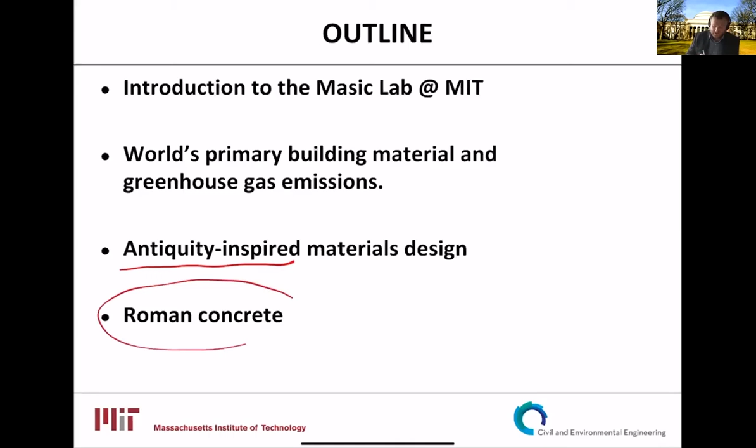At the end, I will focus on Roman concrete as an example of this design. This is the Mašić Lab at MIT, where we design some really high-performance advanced materials of the present and future, including self-healing cements, damage-tolerant ceramics, and even some high-performance photovoltaic devices.

To do this materials design, we try to learn from two essential sources: one is nature, and the other is the ancient world. Especially during my work in Germany, I have been studying biological materials and how these materials perform extraordinarily, and how we can extract some of these concepts. I will introduce this bio-inspired concept quickly in the next slides, and this presentation will focus mainly on the left side of this slide.

Biological materials, I found them fascinating because nature is able to handle very small building blocks, these nano building blocks. Nano means, you know, 1,000th part of a micrometer, so it's 10 to the power minus 9 of a meter, which is a really very small unit that nature manages to organize. Nature learned this through a process called evolution, and we arrived at these high-performance biological materials that are somehow optimized for a specific function.

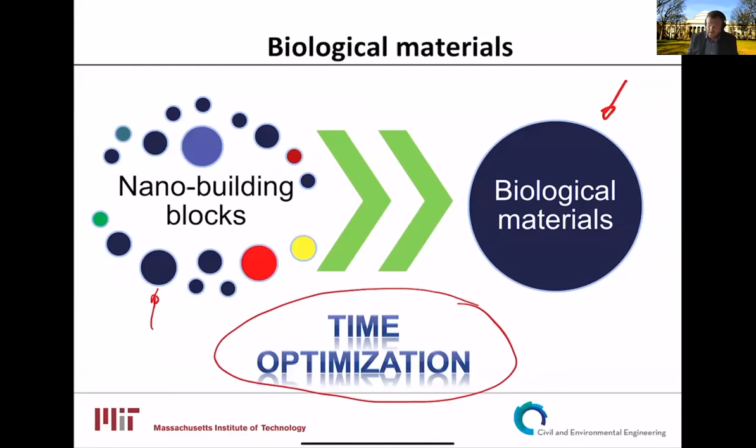What I have been doing in Germany, and then moved also this work to the States, is finding these materials in nature, and then studying them from a macroscopic through micro scale and down to nanoscale.

Eventually you understand these complex structure, function, and chemistry relationships that then allow you to design something that gets close to what nature has been able to make through that process that I mentioned.

So here are three examples. Bone is a self-healing composite made of collagen and mineral apatite, and has a really interesting hierarchical structure that we have been studying and trying to understand, along with the processes that occur during healing, and how these processes might be translated into the inorganic world.

And advanced functional materials. Another example here is using silicates. This is a deep sea sponge that has a very complex structure leading to outstanding mechanical properties of a glass. A glass generally breaks, and these sponges show much better performance.

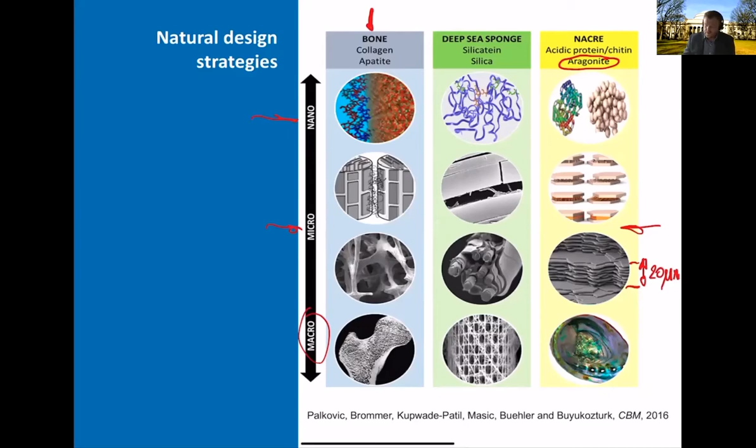So how do we do this? There are many ways to approach this problem, and we in general combine modeling and experiments. My lab is particularly focusing on experimental methods, whereas colleagues are taking care of computational modeling. Our aim in this work is really to cover all of these scales through the methods that we use.

When it comes to experimental methods, I'm covering most of these scales through scanning electron microscopy. You will see some results from this electron microscope.

Diffraction is of course very important and key in all this. My work specifically is Raman spectroscopy, namely interaction of the material with light that then informs us on the structure, which can go down to a molecular scale. So all these spectroscopic and microscopic techniques are correlated with mechanics.

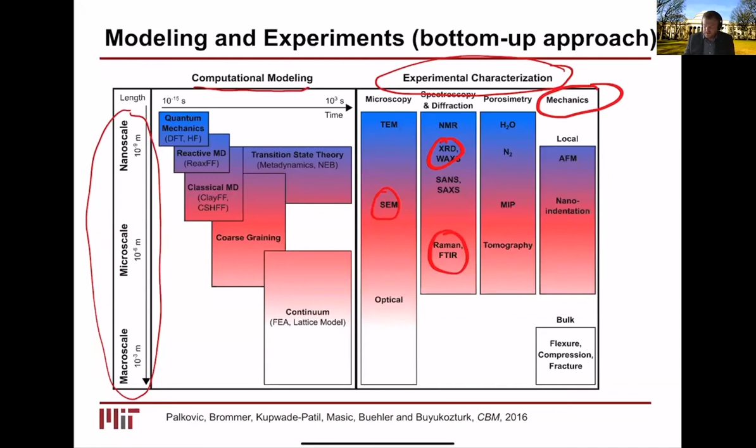And here, from the macroscopic point of view, we are very much interested in macroscopic behavior, compressive strength, but also we explore other scales through micro or nano indentation and atomic force microscopy.

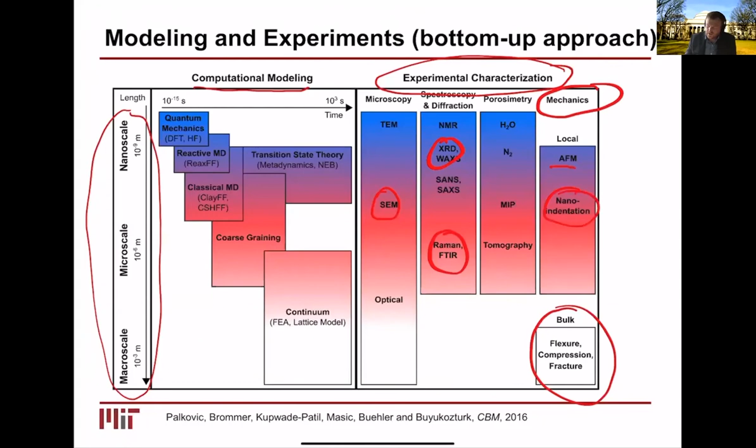Here is an example of the kind of big microscope that covers a lot of these functions, installed in my lab. This is an advanced Raman microscope, so you get molecular level interactions through Raman imaging, but it also has integrated atomic force microscopy for mechanics that you can then correlate with Raman.

It allows you, for example, to work on irregular surfaces, which is often very important with ancient samples that you don't want to touch or prepare before operations. And eventually you like to connect mechanics with all that other signal data.

So you see a very complex characterization platform, but that is the key eventually to move into exploration of complex materials that are biological and ancient materials.

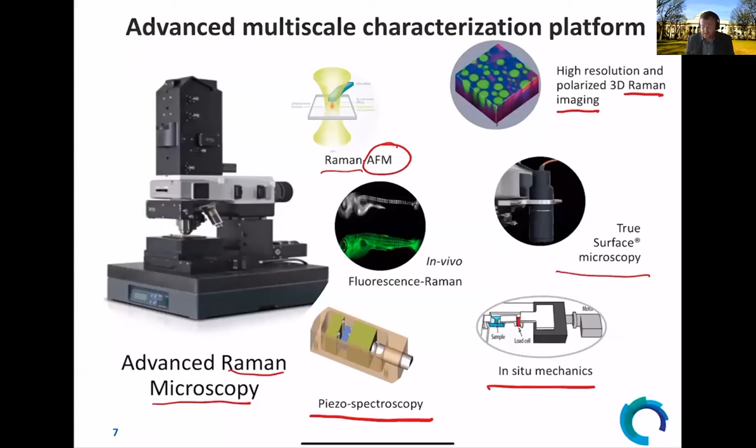When it comes to biological materials, you see from this slide I studied a lot of exotic animals that generally were provided by my colleagues around the world, from Santa Barbara to Singapore and so on. We were able to identify very interesting and intriguing materials that then led to a lot of technological solutions.

Here I show a few examples of those, like this stomatopod, a very beautiful example. It's actually a very beautifully colored shrimp, called mantis shrimp. Interestingly, the mantis shrimp is also quite a nasty animal, in the sense that it uses these clubs here to break protection shells.

Of the animals around it, and then basically eats them. It uses this club to break anything. These clubs indeed require a very high performance impact surface, and this impact surface is outstanding. We studied it, and the results are reported in these publications here.

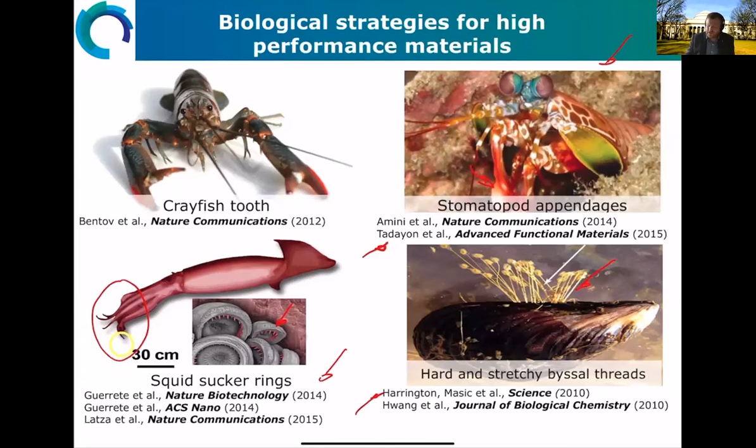And now I see the dates, and I must say it's already a long time ago, a decade ago. Anyways, we look into biology as a great source of inspiration, and we are always in search of materials that could inspire our bio-inspired design. But today I will focus on something different.

And I have a question for you. What is the world's primary building material today? Does anyone know? Anyone? No one responded, but we have a question asking you to clarify something.

What do you mean by thermoplastic protein? Can you elaborate a bit? Yeah, so thermoplastic protein is... let me use this quickly.

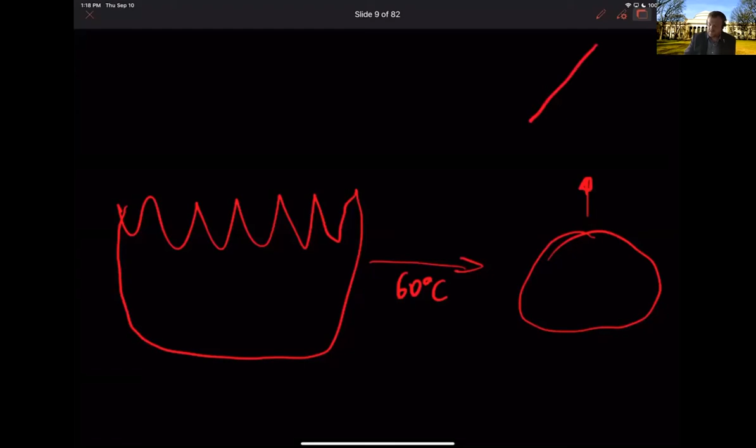So these are like this sucker ring teeth, okay? And if you take this material and put it in water and heat it to about 60 degrees Celsius, this thing will turn into a gel, okay? And then you can deform it and make, I don't know, some sort of shape.

And this thing, upon cooling, will return hard and therefore basically regenerate, let's say, the nanoscale organization that will lead to return of mechanical properties. So it's really as simple as normal plastic, where you basically melt plastic, change the shape, and cool it down. And that's called thermoplasticity.

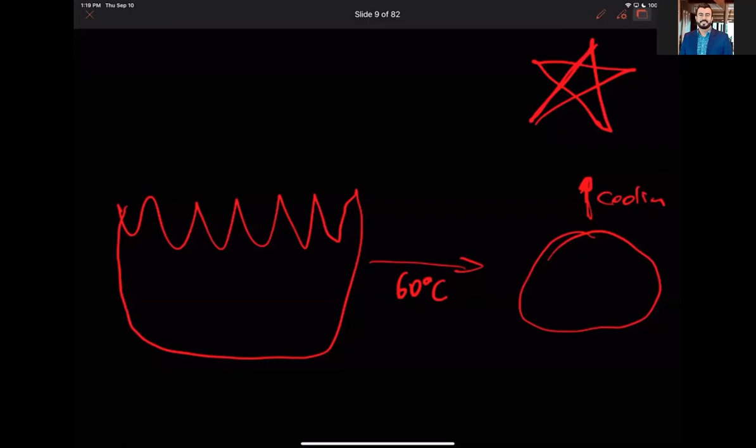And we have an answer from Mr. MD Manjoor Elahi. He said cement. Correct, thank you for helping me with this. So indeed, the world's primary building material is concrete, with its main component cement.

And cement production is really constantly increasing, and expected to hit incredible numbers by 2050. These numbers are between 1.3 and 3.4 tons of cement produced per year per capita. Meaning each of us will account for about 2 tons of cement, because we need that to build our infrastructure, our constructions, or anything where this building material is needed.

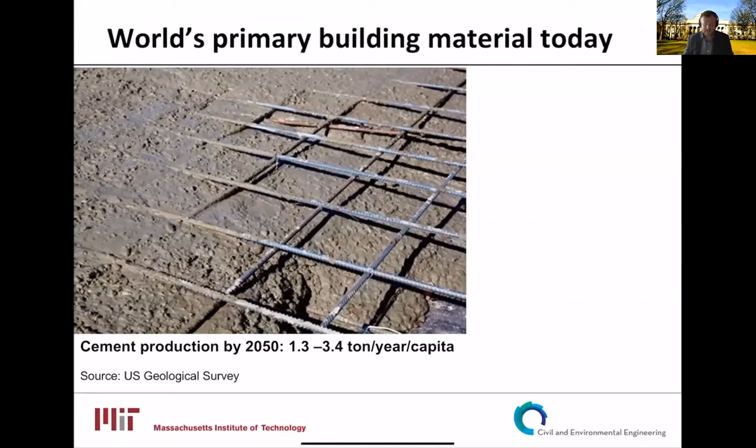So indeed, that's great. We know how to build with cement and concrete, and we have this reinforcement that compensates for problems of concrete in tension. In compression, concrete is really good, but not as well in tension, and this means we need to reinforce it using steel in general.

So the problem, though, for cement is this number here. It turns out that for each ton we produce of cement, we emit about a ton of CO2 equivalents into the atmosphere, which is really a problem, because cement is one of the major contributors to greenhouse gas emissions. We are talking about 8% of total carbon emitted coming only from cement, okay?

Which is huge, and we don't have quite solutions for that. And you know why it's important to stress the fact that CO2 is a problem. I mean, we are quite familiar with the fact that in past years, indeed, we had increase.

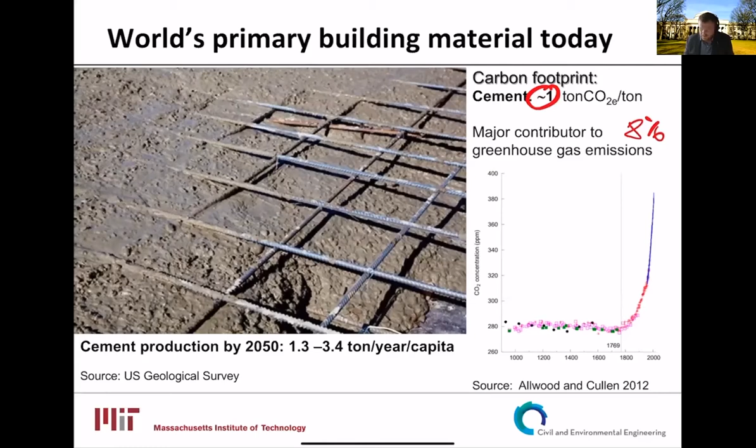I like to show this graph. I don't know if you see here what is plotted, but on the x-axis are years, and here is the concentration of CO2. Okay, and you see these are some of the measurements we know about, and you see it's flat till...

This is another very difficult question, I must say. I don't know even if I should ask, but if anyone knows what this year here represents, please write it in the chat. While I give them time to write down the answer, we had one regarding the previous question.

Anita asked, wasn't clay before the cement? Yeah, that's correct, I must say. We are talking about numbers here mainly - it's what's primary, not first, okay? So primary in terms of quantity, so that is my answer. She says, but thanks, we will be talking about ceramics as well.

So, okay, we have an answer from Amina Patak. She says yes, Industrial Revolution, and Anita does as well. Wonderful, indeed - it's James Watt, invention of the steam engine, and that is somehow indeed the start of the Industrial Revolution. And we do see this incredible increase, and now exponential path of CO2 that we definitely are struggling to control, along with the solutions and the aspects of our lives that lead to this increase.

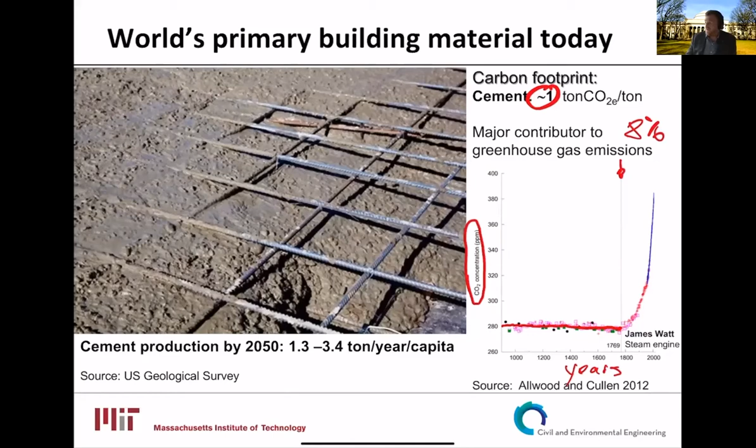So, thank you for wonderful answers. I see a very well-prepared crowd. So now, is it really important, this thing?

We are becoming more and more confident, if not sure, that climate change is real. And projections are quite frightening in a sense that we think between 180 and 320 million individuals will be affected by 2030. So in 10 years from now, such a huge number of people will be affected, and the World Health Organization has pinpointed some of the classes of our society that will be majorly affected.

We are talking about children, who are very vulnerable, elderly people, and unfortunately people that live in countries that are not able to cope with some of these aspects and issues. Outdoor workers definitely are going to struggle with working outside and needing to resist heat that is projected to increase.

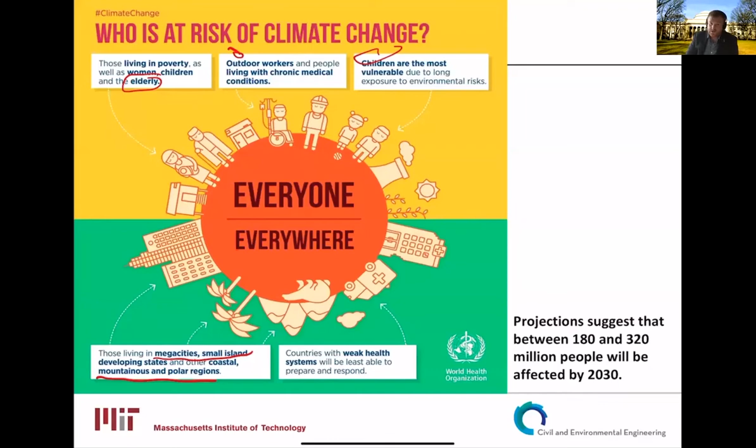I want to stress what I said before - 8% of total reasons for these changes comes from cement. So cement production is definitely a challenging place where we can work on reducing CO2 because of these reasons shown in this slide.

Half of the production of this CO2 emission comes from degradation of the main ingredient necessary to make our cement clinker, and this is calcium carbonate. If you take calcium carbonate and bake it at about 800 degrees C, you will produce calcium oxide plus CO2, and this CO2 is gas - this accounts for 50% of CO2.

And the other part is definitely burning fuel. So most of the fuels we burn indeed produce CO2 and water, and that's a problem.

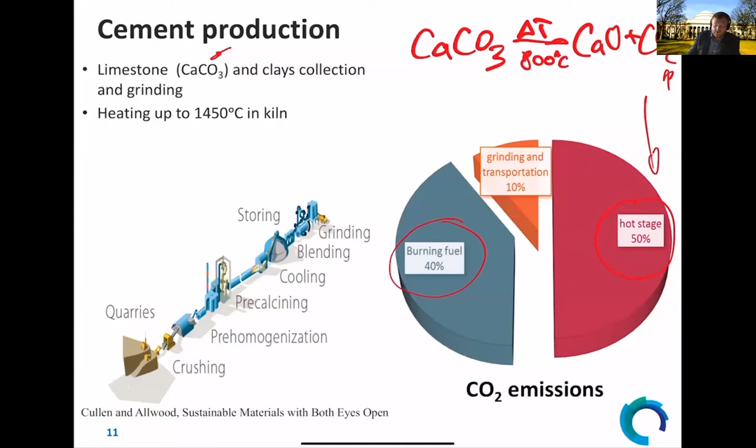The important issue with cement and clinker production is the temperatures - the temperature we need to reach to actually make these reactions to produce clinker, and they arrive at 1450 degrees C. So this temperature is incredibly high and requires a lot of fuel.

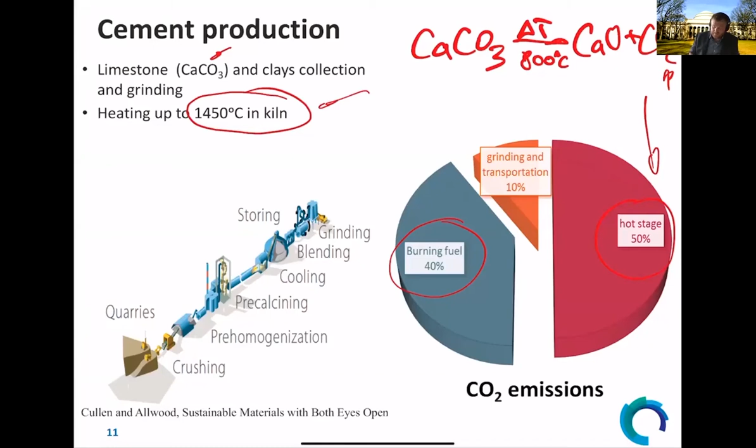So our aim is to work on that temperature and reduce it, but making the same materials for the concrete. Let me tell you a little bit about my opinions on how we can work on reducing the carbon footprint of cement.

One important solution, in my opinion, is really making our constructions in a way so that we use as little as possible cement and concrete. So use less concrete by design, and of course this has to apply from microscopic to macroscopic projects, and try to really optimize design so that we don't need to pour huge amounts of concrete, but still maintain structures in a condition so that they resist and satisfy minimum requirements of performance.

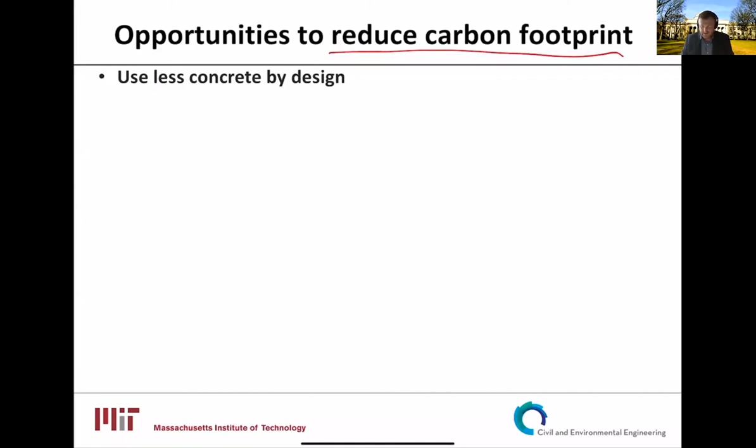Another very interesting perspective is 3D printing of concrete, which brings a great opportunity to place exactly where you want your mortar concrete, and then avoid the parts that perhaps are not load bearing and therefore use less material. That's a really great promise.

There are several challenges associated with this technology. It goes from the macroscopic construction side, to mixing supply, printing systems. Reinforcement is definitely a problem - it's very difficult to integrate and make rebar using 3D printing technology.

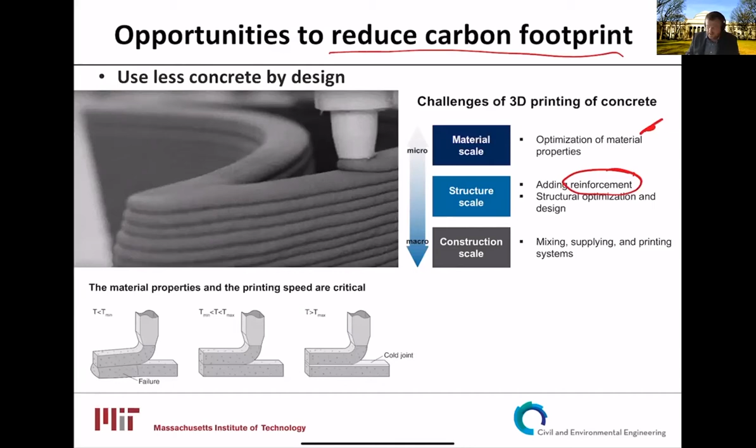And of course, there is a huge effort in making these materials better, especially because we are completely changing the way we build, and so depositing tiny layers of material leads to many optimization aspects that we need to take into account. That's more or less an important challenge we are also dealing with in our lab.

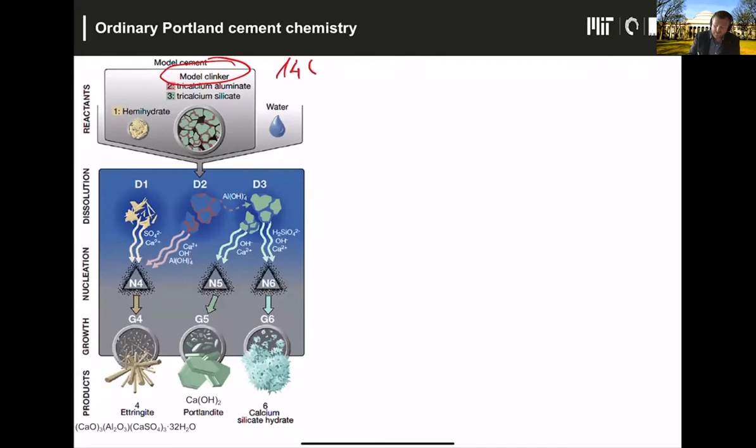So I mentioned quickly what ordinary Portland cement is doing. We need to produce this clinker - these are like tricalcium silicates, alite and belite, that are produced at those 1450 degrees C, and then we add a little bit of gypsum and hemihydrate into the mix, and of course we add water.

This is a schematic representation of the complex chemistry that happens during the hydration of cement. You see there is some dissolution, nucleation, growth, and then the final products include mainly calcium silicate hydrate, CSH, that is the backbone of the concrete, cement, and some other components such as calcium hydroxide, portlandite, and ettringite.

And so this chemistry is very important to be able to, for example, tune and control the 3D printing that I just mentioned. In my lab, we are getting really close to understanding molecular level transformations of this complex system using some ad hoc setup under the Raman microscope that you have seen in the first slides of this presentation.

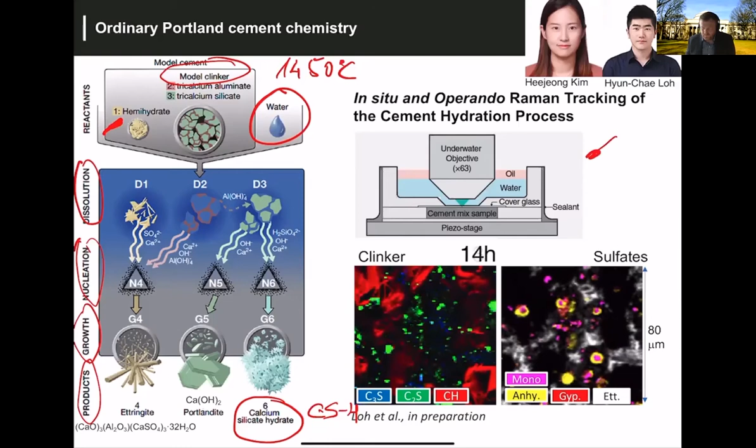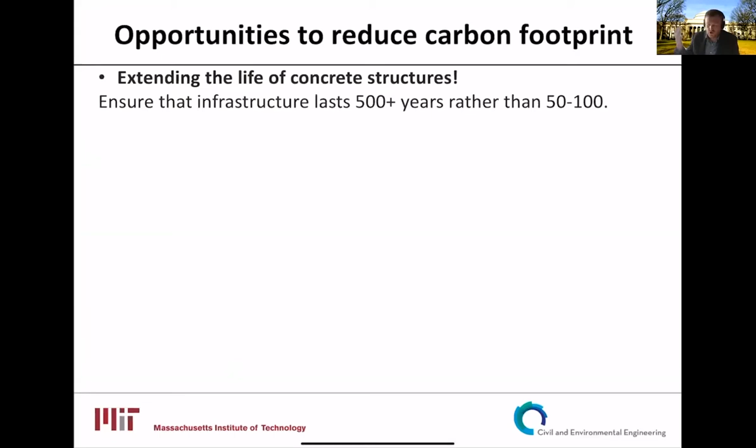The second important opportunity I would like to stress here is extending the life of concrete structures. We realize our infrastructure is not great when it comes to durability, and extending a lifetime will mean less reparation, less reconstruction, demolition, and so on. That eventually will lead to less production of cement and concrete, and therefore a decrease in the global carbon footprint of this material.

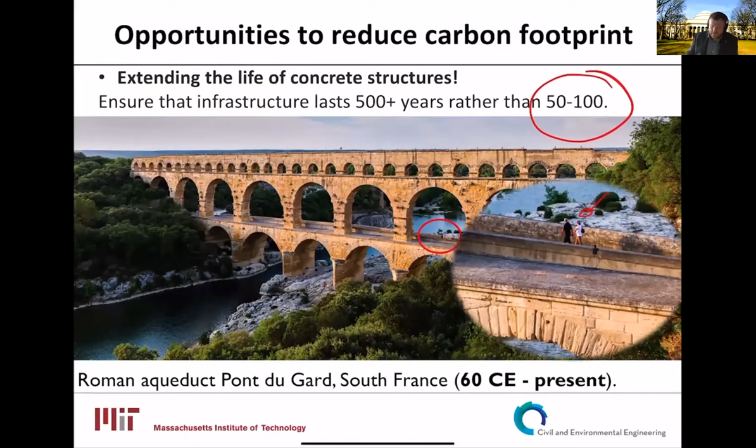That's definitely an interesting concept, and we don't need to go far to find extraordinary constructions, buildings, and infrastructure of the past that actually lived much longer than what is the expected life of our structures made out of concrete. This is a Roman aqueduct, about 2,000 years old, where people are still walking. It's constantly used as a structure, as a bridge, in southern France.

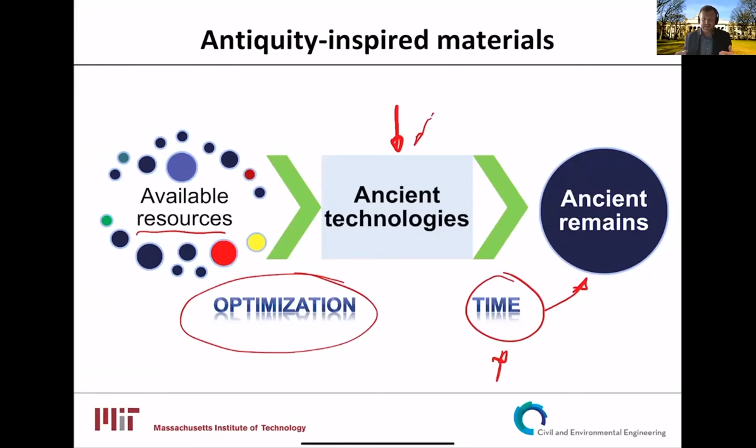That brings me to the concept of antiquity-inspired materials design, which is very similar to what I showed for biological materials, but in this case we have one additional step. The optimization is more or less similar — you have available resources and some civilization that arrived at an ancient technology, but this technology was abandoned or left there, in the case of the Romans, for perhaps 2,000 years. So it arrived to us in the form of ancient remains that guarantee some sort of durability. This time is exactly what we want — it's tested material that was made 2,000 years ago and somehow arrived to us. What didn't arrive was not good in terms of durability, but what did arrive is a great source of inspiration. And we have many materials that did arrive to us.

Apart from Roman concrete, a beautiful example is Egyptian blue, a material the Egyptians made to cope with the issue of blue pigment that was quarried and excavated in Afghanistan — the only source in the ancient world for this blue pigment. They wanted to use blue, but it was quite expensive, or would take a lot of time to source from Afghanistan. What the Egyptians came up with is Egyptian blue — indeed the first synthetic pigment, to our knowledge, showing outstanding properties both in terms of durability and emitting infrared light. That's one of the inspirations, one of the properties we look into to optimize, for example, solar cells.

Another very durable blue pigment was produced by the Mayans, who used clay and indigo colorant to create a blue pigment resistant to both acids and bases even in boiling conditions. It's an incredibly resilient pigment that was, and still is, a topic of studies in labs around the world.

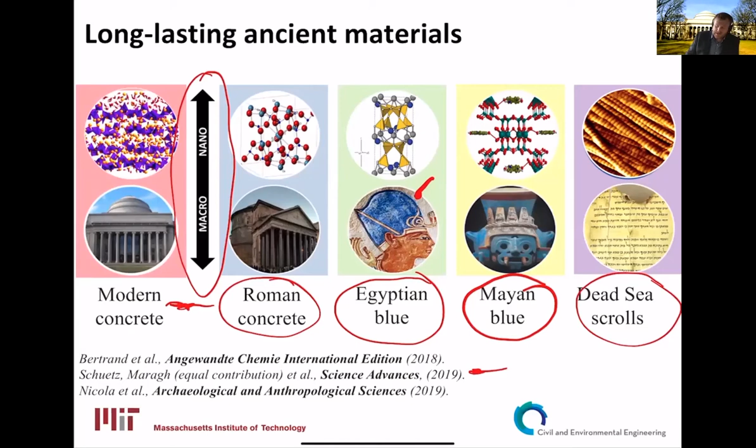I must say, when it comes to Romans, I'm very much passionate about it, because it's somehow wonderful to look at how their history evolved, and how they managed to actually build such outstanding constructions and such a huge empire.

So when it comes to ancient Romans, we probably talk about four main achievements when it comes to infrastructure. We are talking about use of arches and vaults that allowed continuous building, and these shapes that aesthetically would be wonderful, but also in terms of performance. And that was possible also because they invented concrete.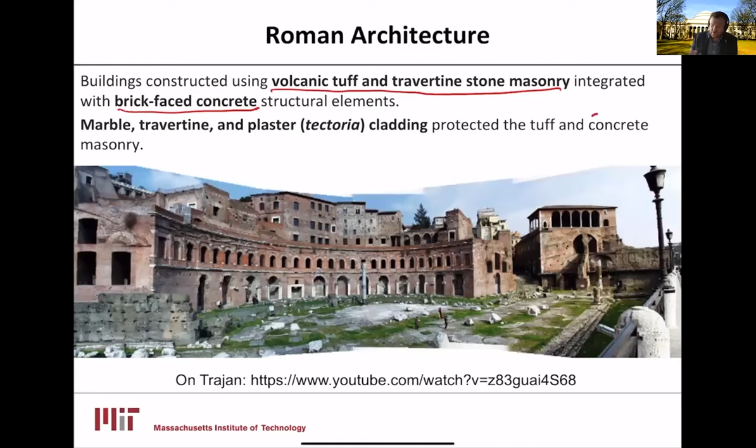This is the example of Trajan's markets. But here is the example of how they were doing this. It's fascinating to see, because they would make it beautiful from outside, and inside they would put whatever they found that would then be connected through the mortar - that is cement and concrete - that I mentioned so many times now.

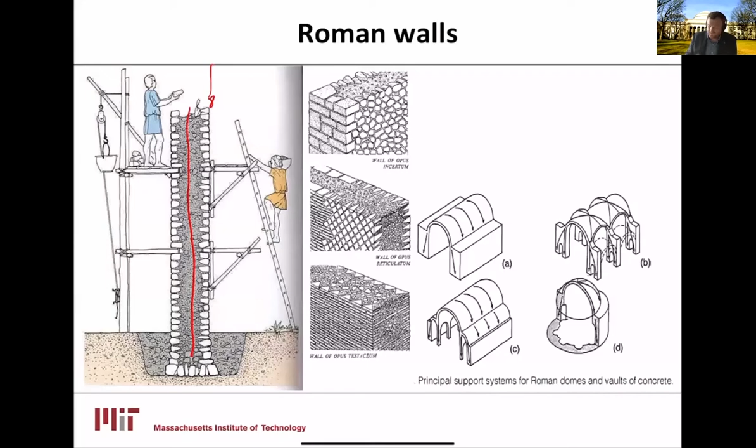So opus caementicium is a construction technique that would use a lot of aggregates and binding agent in combination with water to create that solid poured structure, the backbone of all these constructions.

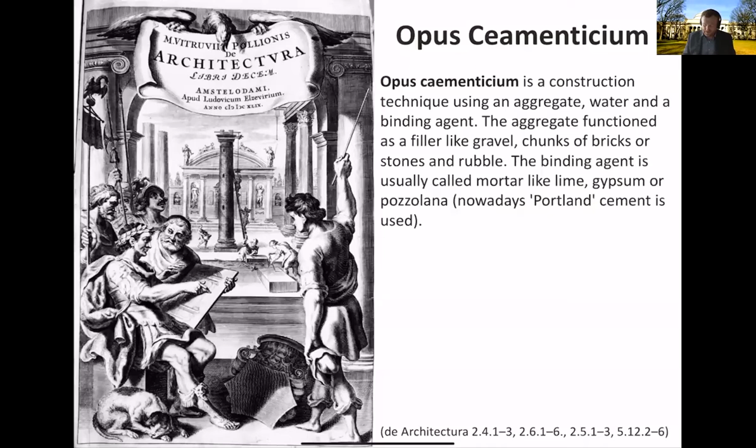I am showing here this print that comes from a reprint of an important book. It's called De Architectura. When you mention Roman technologies, you can't go without mentioning Vitruvius, who wrote this book that describes most of the technologies that were used in that specific time.

He started this book during the peace, Pax Augusta, around 20 to 30 before Common Era. He is famous for that Vitruvian Man that Leonardo considered in his notes, and of course the 4 elements.

I have another quick question: what are the 4 elements of the ancient world? Who knows that? Anyone? Okay, I will let you think about this. We have an answer: fire, water, earth, and air.

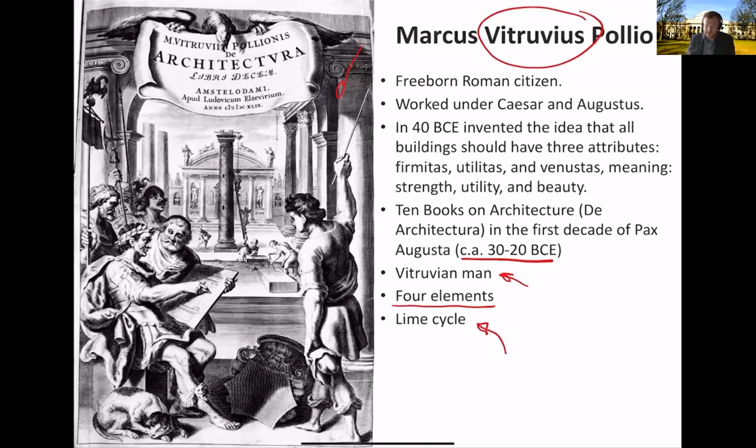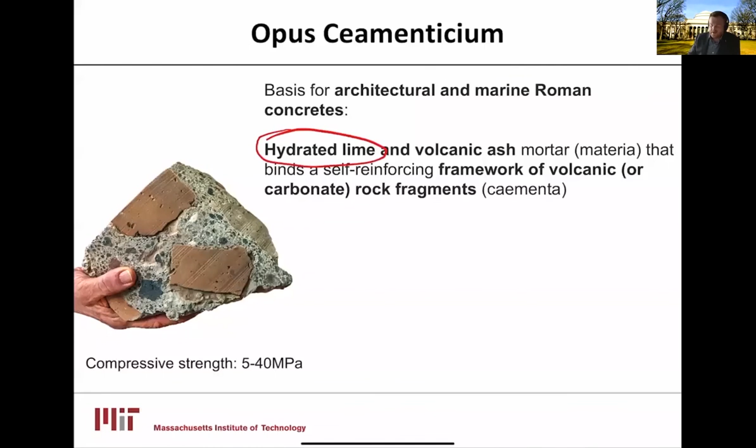Correct. And all of these 4 elements are actually part of the lime cycle that is also part of the invention of Roman concrete. So let me say that the architectural and marine Roman concretes include lime as a key component, and another essential component that the Romans came up with is volcanic ash.

The volcanic ash, in reaction with lime, creates this framework - a self-reinforcing framework that is Roman concrete. You see in this picture, there are big aggregates, and then there is this mortar here. So that's the Roman concrete on the macro scale.

Just to give you details here, when I say mortar, we are talking about fine aggregates, less than 5 millimeters. And when we talk about concrete, we take also these big aggregates into consideration. This holds for modern concrete as well.

So to reinforce the concept, you need lime, you need a volcanic reactive component called pozzolana, and water to make our cement, that then will go into mortar if we use fine aggregates, or concrete if we use mortar and coarse aggregates.

Quick chemistry class here. I already mentioned this process: when you take limestone to make lime, you need to heat it at temperatures bigger than 700 degrees C - I mentioned 800, 900 degrees is what we generally use to produce quicklime. And you remember this CO2 that was emitted.

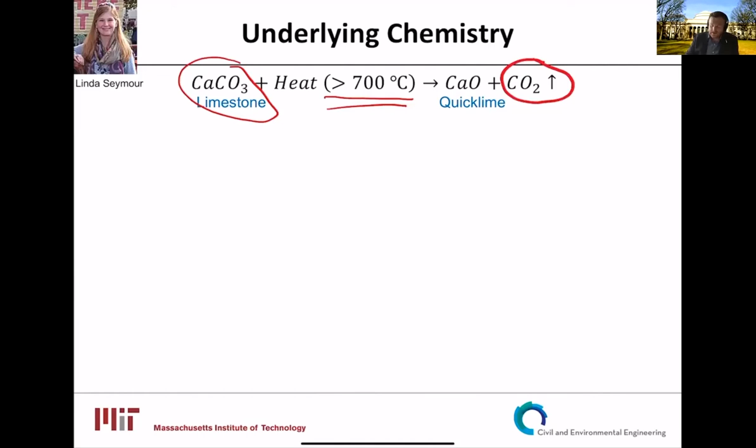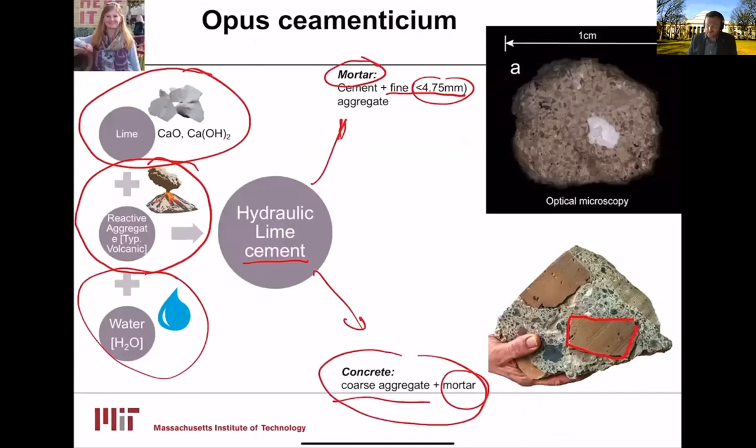Quicklime then reacts with water to make slaked lime, which emits some heat. Now there is an opportunity to go back to calcium carbonate, back to limestone-like material, by reabsorbing CO2.

This is air lime mortar before Romans. But Romans then put pozzolans into reaction, and pozzolans would take this lime to another product, not the calcium carbonate that would reabsorb, but calcium aluminum silicate hydrates.

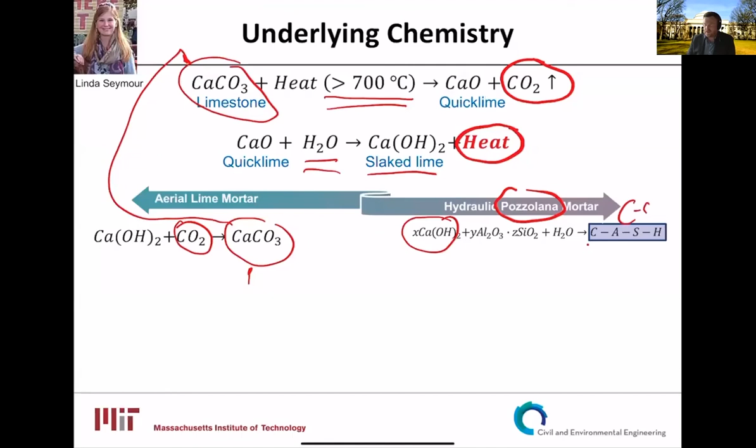I already mentioned calcium silicate hydrates, CSH, which is very similar to what we see in ordinary Portland cement. So in this slide, you see the connection between modern and old through these hydrates that are actually key for the integrity of our concrete structure.

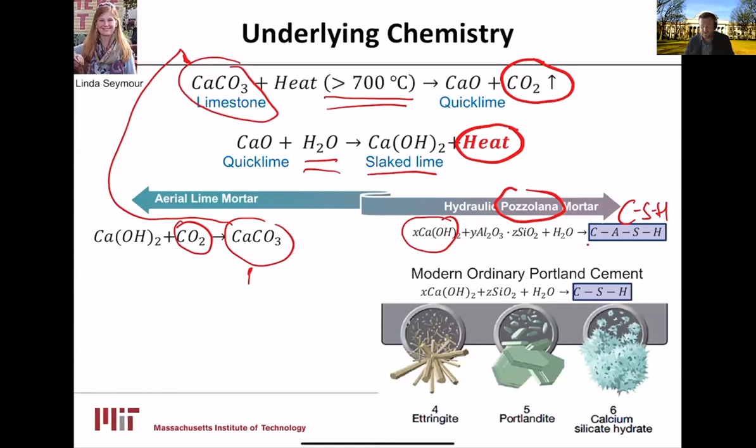Pozzolans, just to give you an idea how they look, it's a powder. We do use pozzolans as additives to modern concretes, and something else, some other volcanic material used by Romans, is pumice.

Pumice is a volcanic rock that is very light. The density is a quarter of water, which is really amazing, a very light stone that shows the pozzolanic reactivity.

Another material that the Romans used is indeed a clay product, the ceramic we call in Italy cocciopesto, which is becoming more and more popular. Romans would add this material into mortar mixes, and probably they learned this from others because we find some constructions before Romans, but especially water-related applications of Romans are pinkish because of the cocciopesto.

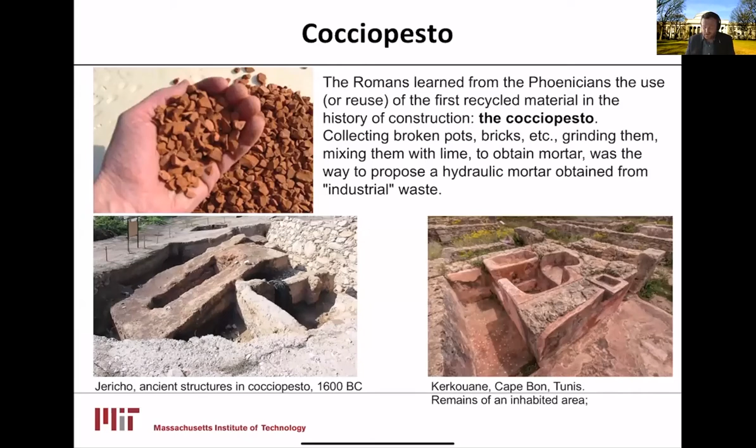Returning to concretes, Roman concretes, architectural mortars, and marine mortars. What I didn't mention that's really important is that these blocks of Roman concrete actually set in water as well. So the key ingredient and key reaction is hydration, not CO2 uptake anymore.

This means that these constructions would harden even under the surface of the sea, and that's really an important aspect that allowed the Romans to construct harbors and all the infrastructure in the Mediterranean.

But in both architecture and marine mortars, they would use lime and a selection of volcanic pozzolans that eventually differ slightly in terms of final products. In architecture mortars, you'd have strätlingite, and in marine mortars, because they are constantly in marine water, some other reactivity happens, and generally aluminum tobermorite is the material correspondence of CASH.

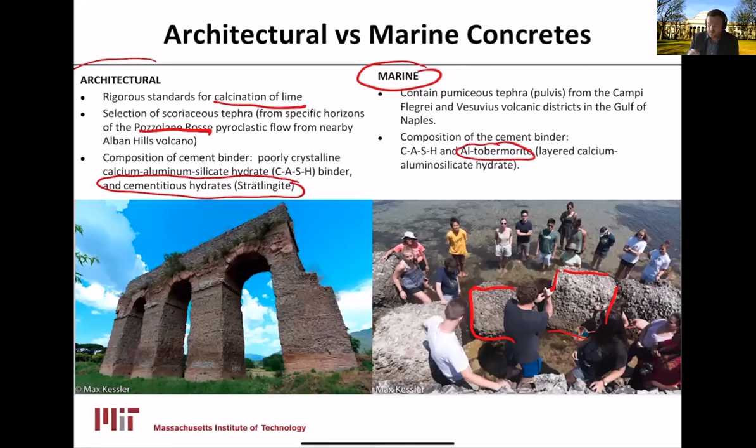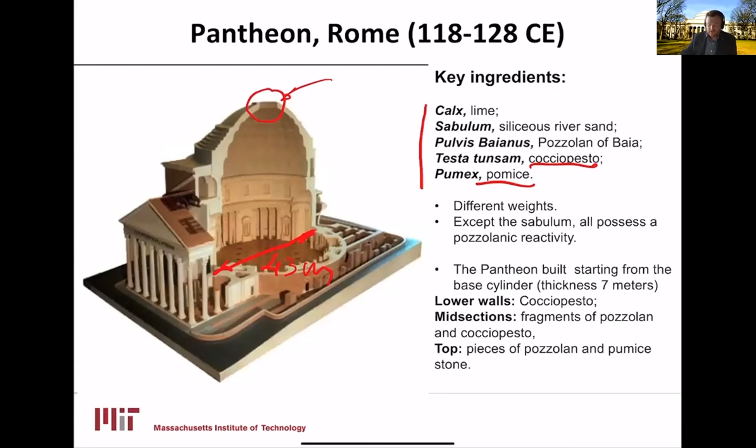Let me give you the recipe for the Pantheon: they used lime, sand, and pozzolan from Naples, Baia, coccio pesto, and pumice. Especially in the case of the Pantheon, the top parts of this incredible dome that measures something like 43 meters in diameter, the top with the oculus, is made out of pumice in general, mixed with pozzolans. Because pumice is very light, and because this is a huge concrete structure, it allowed these engineers to design something of such dimension using concrete without collapsing.

We actually have a question related to the stuff on this slide. Leila is asking, what is the value of cocciopesto? Does it replace pozzolan? Yeah, does it replace that other one I can't pronounce?

Yeah, coccio pesto, and yes, the value is fascinating, because it turns out that similar to pozzolans, coccio pesto reacts with lime to produce calcium aluminum silicate hydrates, which is like an artificial pozzolan that you could integrate into your mortar and concrete.

I don't know if this is a good answer for this question. There are a lot of kinds of questions around coccio pesto when it comes specifically to application in water-related infrastructure. Turns out that it makes this mortar extremely resilient to water, though we don't know yet what are the reasons. We do study this currently in the lab, so I hope we will be publishing something soon.

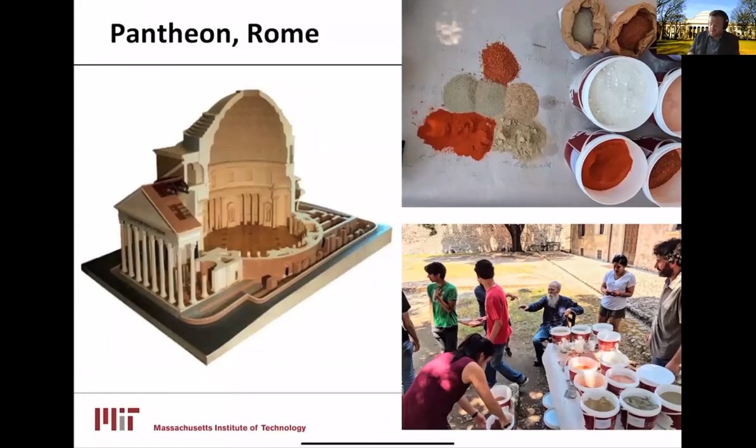So here we go, these questions are connected with this slide, which shows why we are so excited about Roman concrete. We're excited because, as I told you, it requires only 800 degrees C for calcining lime instead of 1450 degrees C, so we need less fuel and have lower production energy.

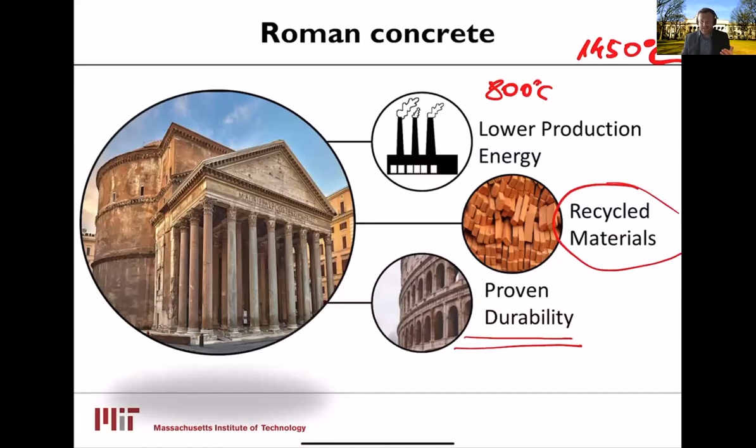We sometimes use recycled ceramic materials to make this concrete. Most importantly, this material lasts a long time. Unfortunately for us, but fortunately for my lab, the reasons for this durability are still not clear.

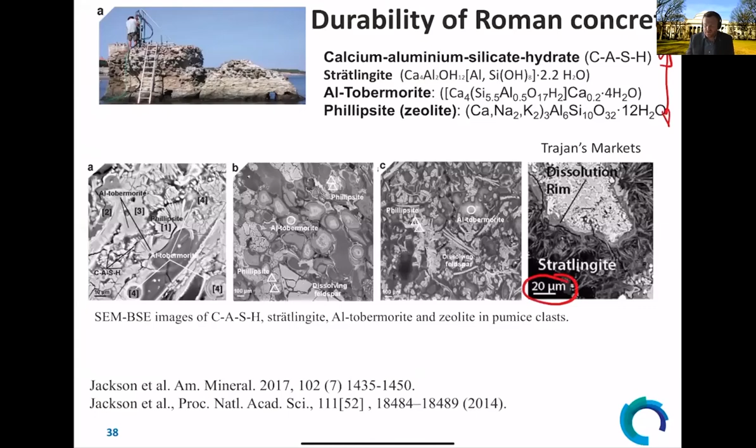So what are the origins of this extreme long-term durability? We believe, along with Marie Jackson and other scholars, that fluids supersaturated with calcium, silicon, aluminum, sodium, and potassium crystallize into materials such as strätlingite in architectural contexts or aluminum tobermorite in marine environments. These constantly reinforce and fill gaps, acting like a living organism. Every time there's degradation, these fluids migrate and mineralize, crystallizing in the pores—which is a good hypothesis.

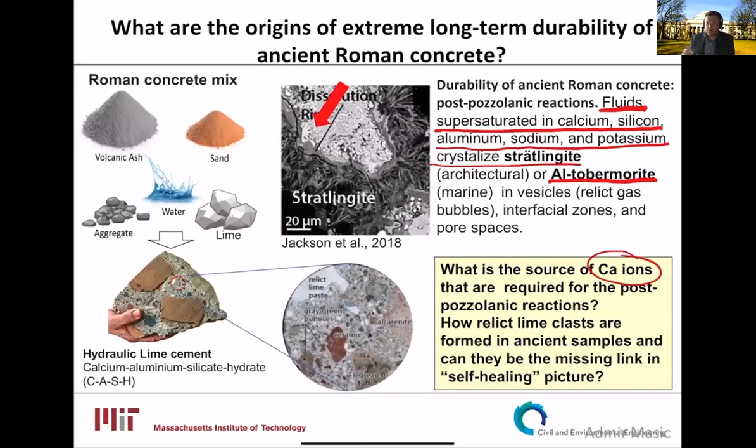Of course, for us, the key question specific to our work is where the calcium comes from.

This brings me to the end of my webinar. What I want to tell you today is that climate change is real—we need to solve issues of rising CO2. Concrete is an important material that leads to significant CO2 equivalents put into our atmosphere. Working on designing concrete structures using less material or making it last longer could lead to significant reductions and therefore more sustainable, better material use. With that, I would conclude.

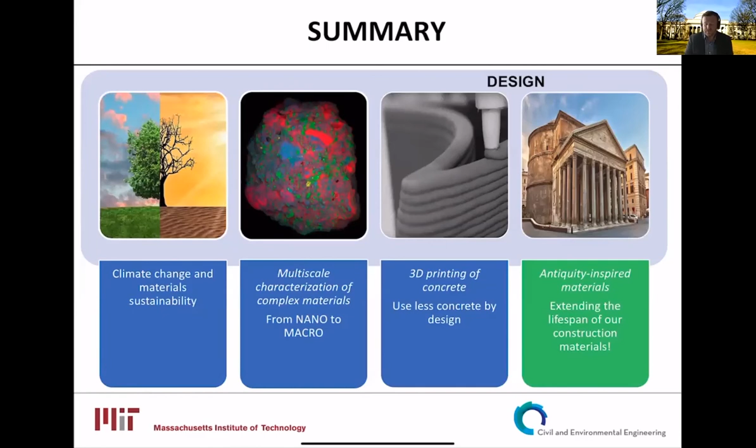I would also like to leave you with this beautiful quote by Empedocles, who said that architects should build as if they were to live 1,000 years, and live as if they were to die tomorrow.